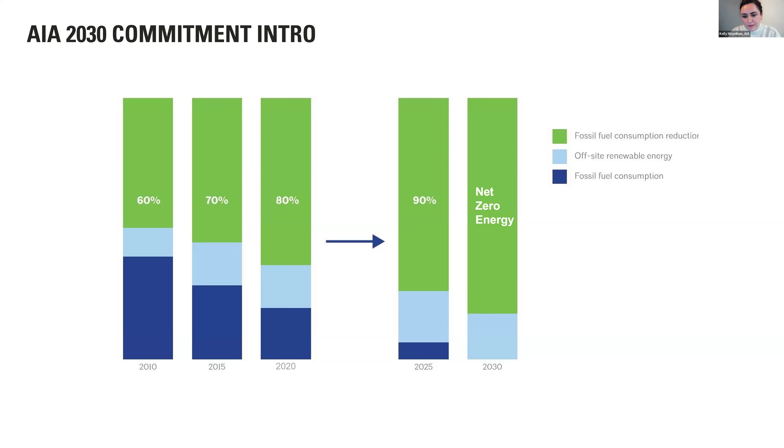So why is this important? I hope I don't have to spend a lot of time talking about this, because most people on this call are aware of what's going on in the world, and have heard before why the climate crisis is real, and that these are things we have to be tackling every day in our practice because they impact all of us across the globe.

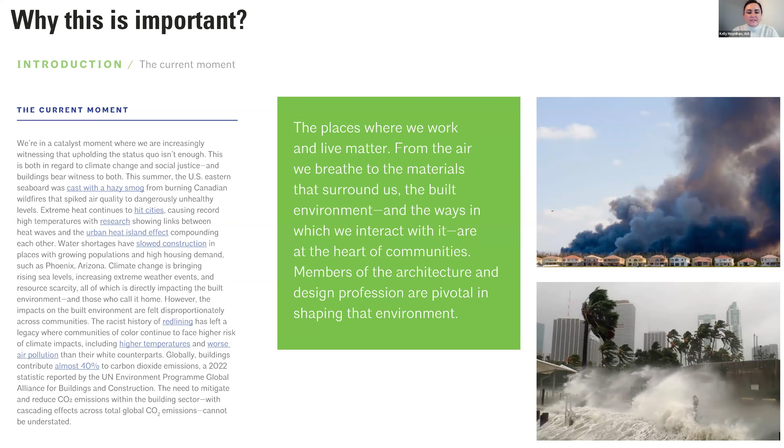Another statistic often thrown out there is that building operations are responsible for about 30% of greenhouse gas emissions globally, and embodied carbon emissions are another 11% of the greenhouse gas emissions globally. So what does this mean? It means we have the huge responsibility as architects, as well as opportunity to be a part of the solution. We are somewhat in the driver's seat to help our projects move towards these 2030 goals, so we can help address the issue that a lot of what we do is a huge contributor to global CO2 emissions.

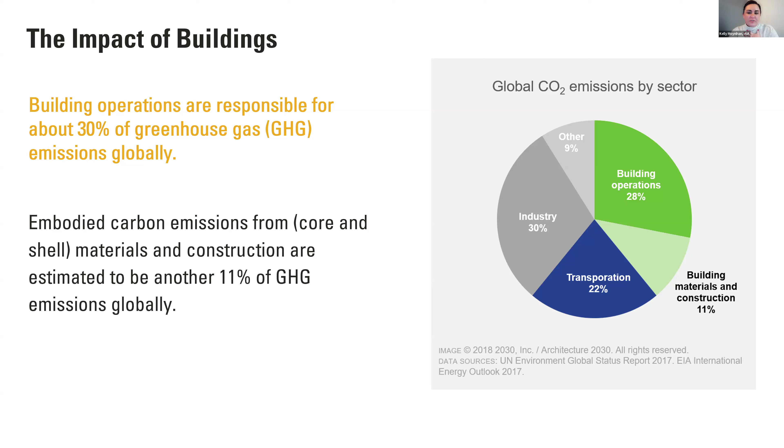So what is the designer's role? How, as an architect, can we be a part of the solution? Architects and engineers have the greatest impact early in the design process, but also throughout. We have to be advocates throughout to make sure this happens, because a lot of times we're not going to be asked to do this. Certainly energy codes are getting better, or maybe clients are already asking for things, but a lot of times that's not enough, or it's just not the case. So it's really our job to be the advocates and champions of this as we move through our projects.

A few ways we can tackle that through the design process: think about adapting or renovating buildings instead of tearing them down. The most sustainable building is one that already exists - that's a quote said all the time, because the embodied carbon of a building that's already built is something we want to address. So if there's ways to use buildings from the get-go rather than do new construction, that's something we should be analyzing and testing rather than just assume new construction.

We can certainly design for extremely high performance and resilience in the way we detail our buildings. Again, building science has already shown us how to do these things - these aren't necessarily new concepts or technologies for how we design better envelopes. So we have to prioritize those.

We should be energy modeling everything as best we can. When you're putting together a contract for a project, if energy modeling isn't required or being asked for, maybe suggest it, in that it's going to make the project better, and suggest that it happens early and often throughout the design process.

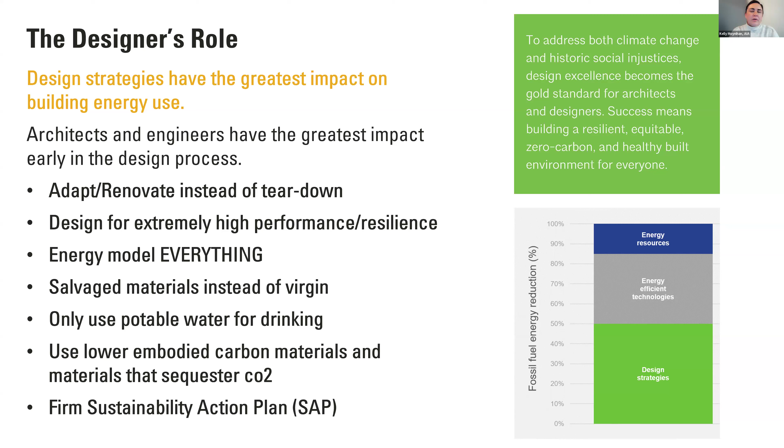And then something we'll talk a little bit about later is having a firm sustainability action plan. That's something more personal to your firm, but it declares your commitments to what your firm is going to do from a sustainability standpoint, whether that's in operations, design process, et cetera.

So how do we also talk about this in terms of benefits to our clients? I think we can all agree these are good things to do, but how do we actually make the argument? Certain things we'd like to suggest as ways to appeal to a client's interests are to talk about resiliency. I think sometimes the word sustainability can be glossed over, or it's maybe a little tired, but talking about resiliency as far as durability or being able to withstand climatic events, and talking about it in terms of maintenance and operations, can often perk the ears of a client.

Addressing ESG regulations, I think certainly when we talk about energy savings as dollar savings, return on investment, those are always good arguments to make. Thinking about market innovation and how that impacts the bottom line of the project.

You can also appeal to maybe their egos a little bit and say, if we do these really innovative, sustainable strategies in our project, it will get you attention, it will win you awards, things like that. I think that can attract certain clients' or stakeholders' interests, as well as the PR message. If you can make certain claims about a project's performance, impact, or innovation, those are things they can also sell and brag about as they get to live and use their space.

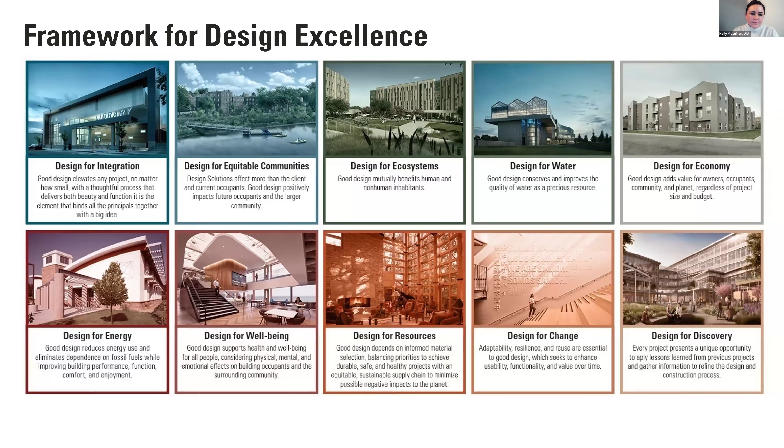So when we talk about metrics and targets for the 2030 commitment, the two big metrics that are considered are energy use intensity, or EUI, measured in kBTUs per square foot per year - that's the amount of energy use based on how big the building is. And lighting power density, or LPD, measured in watts per square foot.

For new buildings and renovations, the targets for this next reporting year - not last year, 2024 - we're still at 80% below baseline, but starting this year we have to be looking at 90% below baseline based on your project type. So this has incrementally gotten more aggressive as time has gone on.

For interior renovations, you only have to report LPD, which should be 25% below baseline. I think this group definitely thinks that should maybe be a little more aggressive, since 25% isn't really all that difficult to achieve, but that's where the marker is now. You're encouraged and able to submit more data than just your LPD, but that's all that's actually required for an interior project.

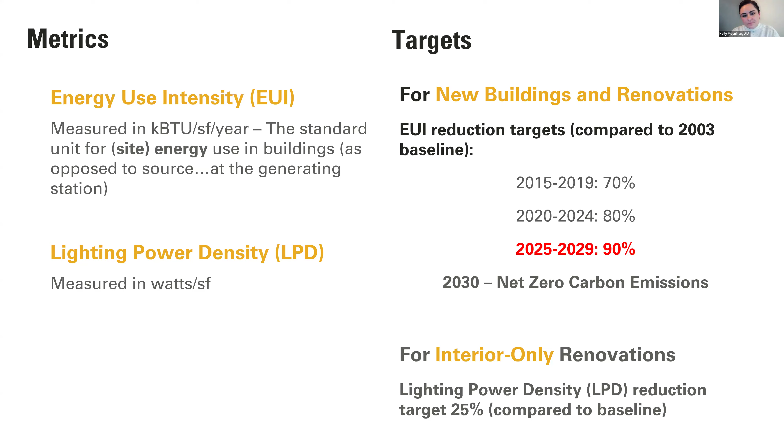So, steps to work towards these reductions. First, you're going to use the AIA DDX, an online platform we're going to see some screenshots from in a minute, to find the target goal based on the use type. If it's multifamily, that has its own base type based on square footage, etc., versus a different target if it's a hospital or education. They're all adjusted based on baselines for those project types.

Our first challenge is to design to reduce overall energy usage. How do you do those things early? You can look at site analysis - specifically what the climate data is for that place, or what orientation is possible for new construction or existing buildings - how do we address its current orientation and how it addresses the site to optimize energy use.

Model and document the predicted EUI, or PEUI, at each phase milestone based on ASHRAE 209. We can develop strategies to hit those goals of reduced PEUI or LPD as you move through design phases. And the goal is that you're reporting and sharing that data for every project every year, regardless of where it is in the design process.

Really you're only reporting your data based on what design phase it's in at the end of that reporting year. So while you could be tracking it throughout the year, if your project is at 50% design development at the end of 2024, that's the stage you would report that data in. For the next year, you would look at whether that project got through to construction documents, because that would be the last time you'd report the data.

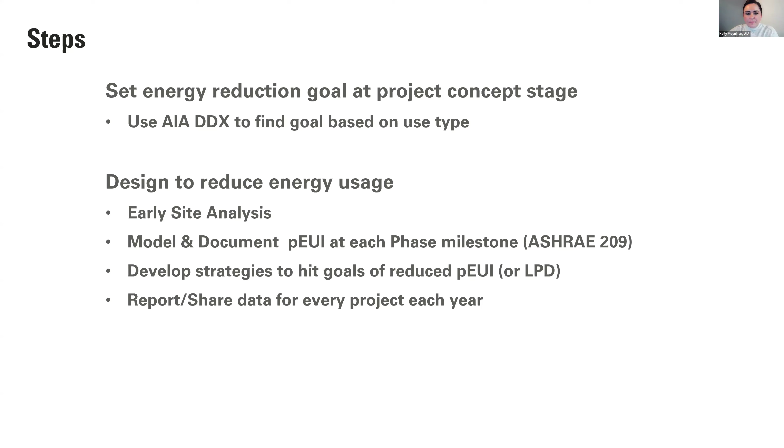So just to say a little bit about how we approach projects - first and foremost, you should be looking at where your project is and getting the climate data for that place. You can address it based on solar orientation, how many sunny days you get in the year, how much rainfall you get, cloud cover, etc. You take that into account as you're thinking about your building form, its geometry, its window wall ratio, etc.

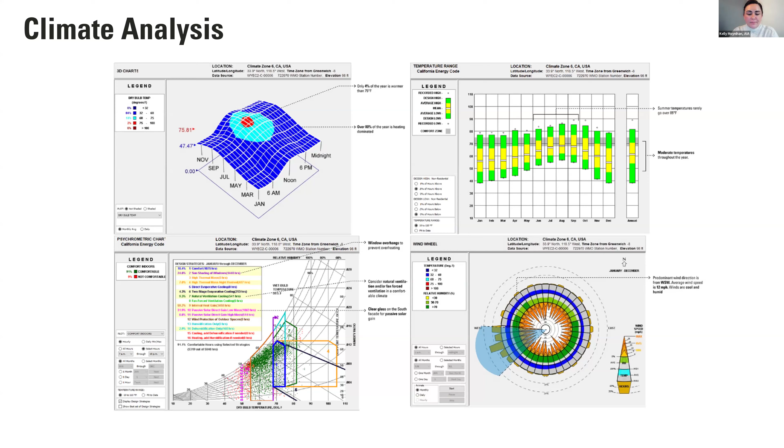Moving into determining the predicted EUI - again, it uses a baseline, which is the code equivalency.

Did everybody hear that? That was weird. Sorry, I don't know what that was.

So you use the code equivalency based on the project type, and that's where the baseline comes from. Again, this group definitely advocates for energy modeling early and often. Your early energy analysis is done in what's usually called a shoebox model, which is sort of a white box with not a lot of articulation.

So you're using that to play with form, or maybe where you're going to have glazing, etc. And then as design moves on, you're going to move into more detailed full energy modeling, where you're starting to introduce system information, etc.

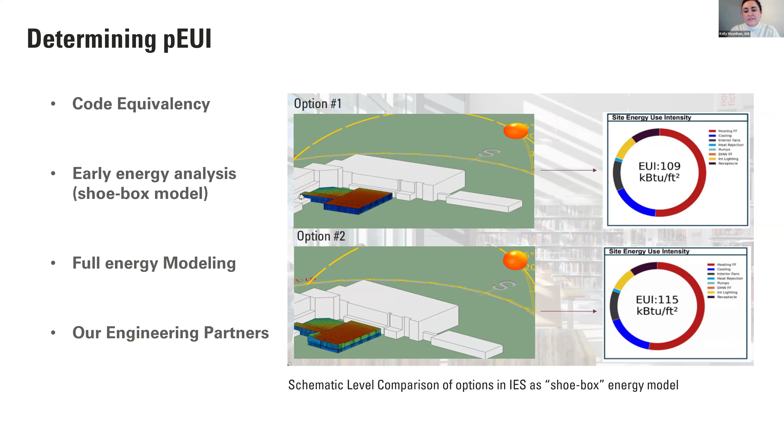That's where engineering partners come into play, because they are just as important as the architect in this design process - they're going to help us right-size our systems in tandem with examining envelope and things like that. They really need to help make sure the accuracy of our systems gets put into the energy modeling. Sometimes they're actually the ones doing the modeling, but either way, we want them to be an active participant.

So, methods of reporting to the DDX. There's a couple different ways to do it on the online platform. You can either do it directly into the DDX, where you're putting in inputs piece by piece, project by project. You can also do a bulk upload via a master spreadsheet or an API link from energy modeling software such as Insight 360, Cove Tool, etc.

And then you'll notice as you do it for the next year, those projects will remain, and you'll decide whether you're reporting for this new year or closing them out. So this is like your main log of all of your active projects.

So if you're setting up a new project, you have to enter some basic information, name, project number. You can leave this as specific or non-specific as you want. Sometimes people want to make sure there's some anonymity with project names and information. But you do need to locate where it is, so postal code, city, climate zone, etc., what project type it is, and construction type.

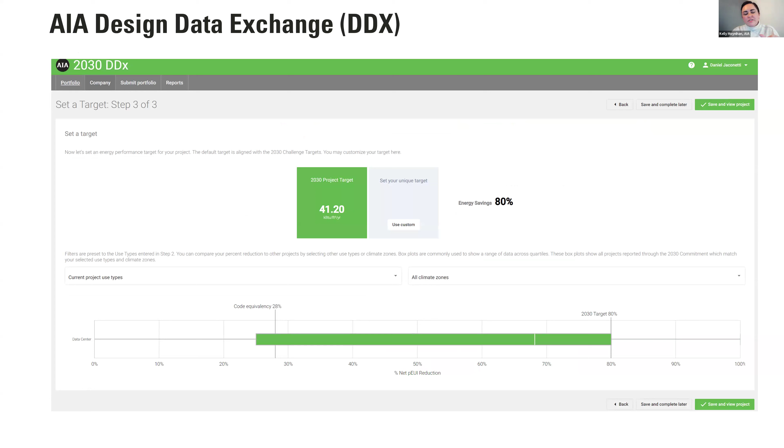So what do we have here? This starts to show you, as you enter all that data, where you land as far as where the 2030 project target is—that very aggressive mark you're supposed to be hitting—and then where you're landing, how other projects are doing in that project type across the entire portfolio.

This is another part of the DDX that is not necessarily required, but being more and more encouraged, is how you're addressing renewables on site, whether or not you have them, and how they're contributing to the energy use of the project.

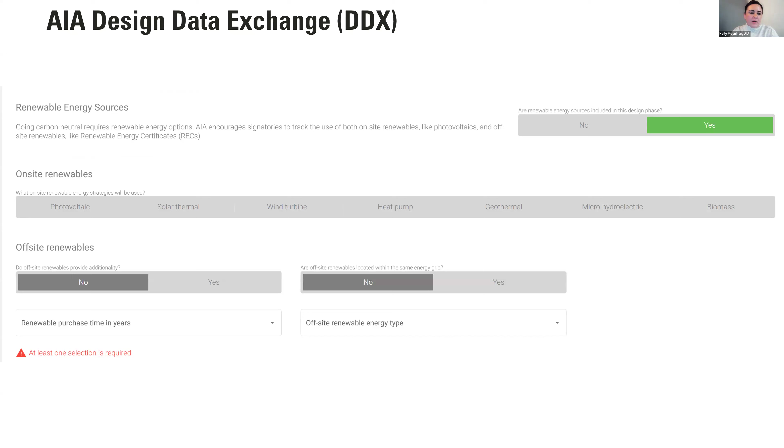And then same for embodied carbon. This is gaining more and more traction, and Daniel will talk more about it in a second. But this is where you actually enter in your embodied carbon modeled data, what tool you use, et cetera.

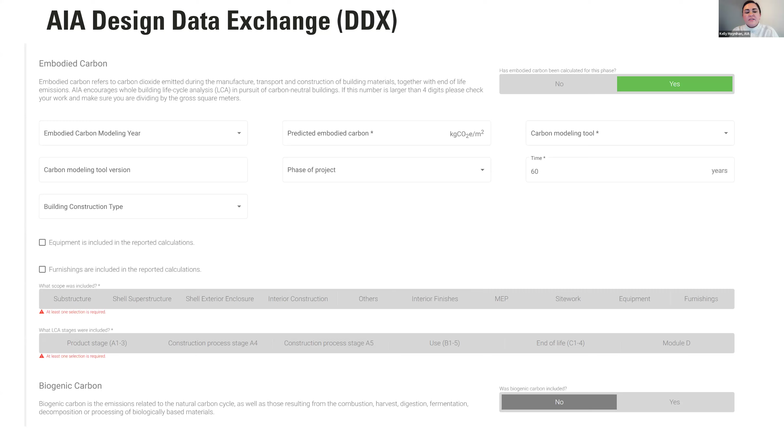Ideally, you wouldn't just be doing this at the end of the year and say, oh, I guess that's how well we did. Instead, it could be something you're updating throughout the year and tracking, so that you could make adjustments in your design process or practice, or address it with project teams, like we got to do better, or we should really be considering modeling earlier on projects so these numbers can get better. So this is how you get a global look at how your firm is doing.

So I think we'll sum up, like, how do you meet these 2030 commitments? It's a very challenging thing to do, let's just say that outright. Very few firms are actually even hitting the targets, but they're aggressive for a reason, because we all have to be trying to optimize our projects as best we can.

So how do you do that? First thing I already said, energy model early and model often, both energy and embodied carbon. This is how you actually track progress and make decisions, and that's how you connect that performance to design excellence.

What story are we telling in these design decisions, and how do those contribute to the story of, is this good design, based on those frameworks of design excellence principles I talked about earlier.

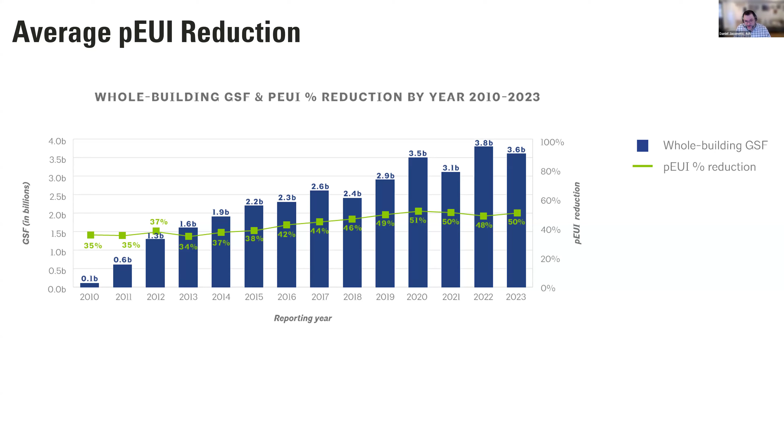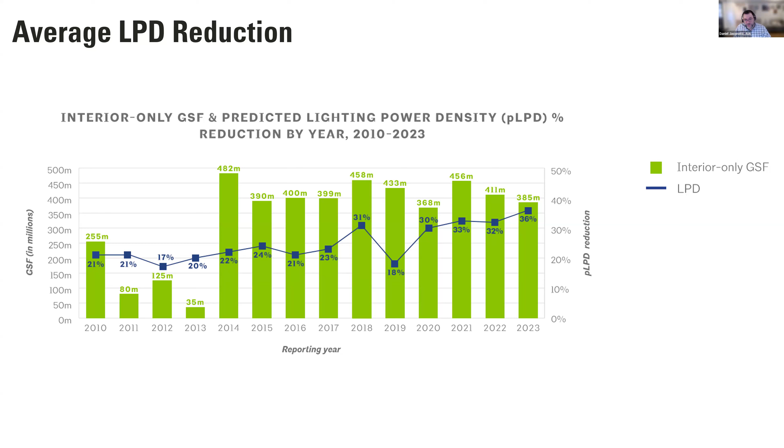Now, going over to the interior-only projects, where again the 2030 program is only looking at lighting and lighting power density — this has been oddly up and down. Who knows what happened in 2019, but it's about 36% on average. The goal is 25, so as Kelly mentioned, we're actually doing better than the average. Maybe we should push this further. Lighting efficiency is often low-hanging fruit, especially with LED lighting.

Before we get into deeper things like electrification and embodied carbon, I want to pause and talk about the carbon dialogue going on, because there's a lot of language about this. Clients are asking, people are playing fast and loose, and there's a lot of confusion about what we're actually talking about. First of all, whether you hear someone talk about carbon, decarbonization, or embodied carbon, at the end of the day what we're talking about are greenhouse gas emissions, predominantly carbon dioxide. However, things like methane are actually more potent than carbon dioxide. But because the most common and most volumetric greenhouse gas emission is carbon dioxide, the industry expresses everything in metric tons of carbon dioxide equivalent. So when you see CO2 with the little 'e' after it, that's saying if we have this much methane, what would that be in carbon dioxide equivalent, so we're measuring it equally. So we're talking about greenhouse gas emissions.

This can be divided into 3 different scopes, per the greenhouse gas protocol. The first 2 scopes can be called operational emissions — this is basically looking at energy efficiency, all the greenhouse gas emissions that come from running a building. Scope 1 are direct emissions from operating it on site. So if you burn any fossil fuels on site — a gas boiler, an oil hot water heater, diesel backup generation, all of that — those are your scope 1 emissions, greenhouse gas emissions happening on your site.

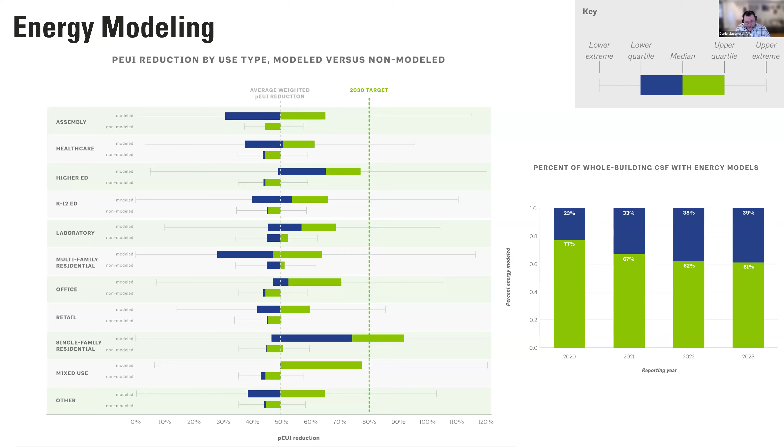And you can look at the chart to the right by year, showing percentage of energy modeling. For some reason it's gone down since 2020, but we're hovering around 61% of projects being energy modeled as a group of reporting firms.

And in case you're wanting to get into energy modeling and you're wondering what people are using -- that's part of the reason AIA collects this data -- you can see that a lot of people are using cove.tool. The next most popular one is IES, which is what my firm uses. I'll tell you, in our firm that's done by mechanical engineers; it's a little bit more difficult of a tool for architects to use. I think a lot of architects prefer things like cove.tool.

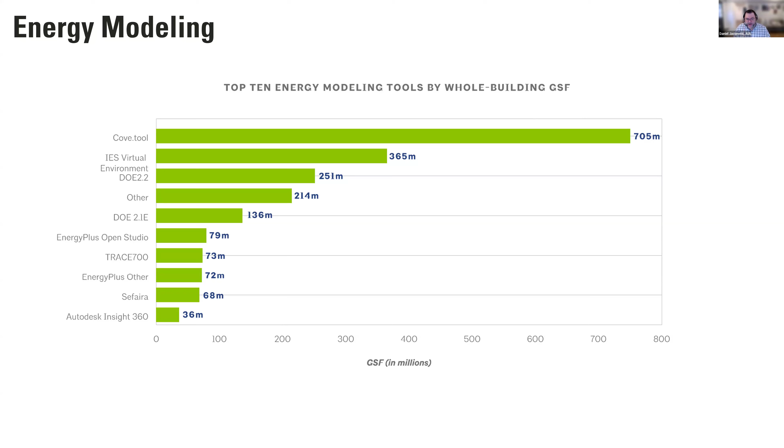And for whatever reason, Insight 360 is down there at the bottom, but Insight 360 actually comes free with Revit. So if you have not done any energy modeling and you're looking to get into it, that might be a good place to start, just because you don't have to lay out any money to purchase something. There are good resources on Autodesk's website, and some good YouTube webinars about how to do energy modeling with Insight 360.

Okay, so we talked about why electrification can be useful. Now let's look at the grid. 20% of the US grid currently is powered by renewable electricity, and if you look at the graph on the far right, that shows how that breaks down. It's predominantly wind, but there's also hydro, solar, biomass, and geothermal.

That's real geothermal, not what we often call geothermal in buildings, which is really a ground source heat pump. This is like tapping into the heat of the earth and using it to boil steam to turn a turbine -- that's power plant scale stuff, not something you're doing on site. 933 buildings reported last year as all electric, so that's great -- you have to report the fuel sources. Kelly showed you the breakdown screen.

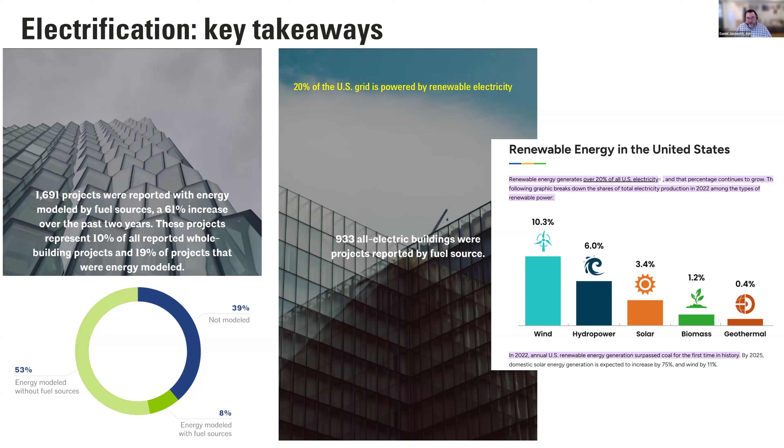Key takeaway: if you're the person in your firm reporting the project, you want to get a copy of the energy modeling report from whoever did the energy model, because you probably know the final pEUI, but you may not have the full fuel source breakdown. Get that copy so you can enter it by fuel source so you can really push on these things.

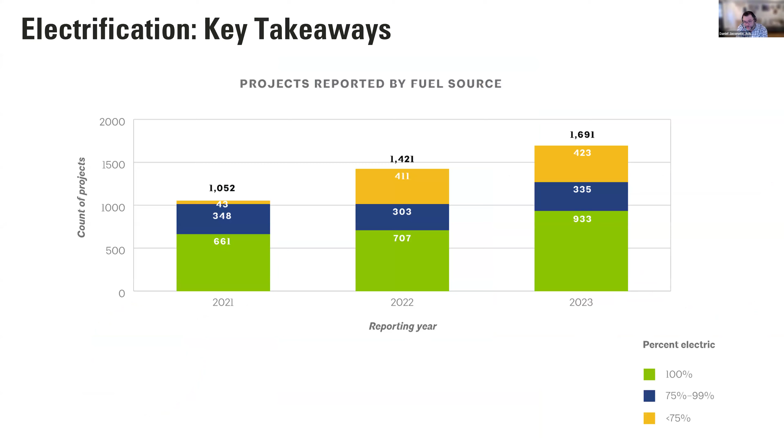Then you can look at electrification for the past 3 years of the program. The number of projects that are 100% electric has been steadily increasing, and you still have a lot of hybrid projects out there.

Renewable energy: there were 430 net zero projects reported, a 24% increase from the year before. That's over 2,000 projects and over 400 million gross square footage using renewable energy resources, which is great.

Projects in California, Massachusetts, Washington, and New York had the most projects reporting renewable energy, while Vermont and Maine led in the greatest percentage of projects with renewable energy resources. I find that interesting because if you look at this map and see the blue and gold, the projects with the most renewable energy reported are also the states with the most stringent energy codes typically, and also states with cleaner grids. It's interesting that these things go hand in hand. You can see the line graph on the left showing the increase of projects with renewable energy over the 3 years of reporting.

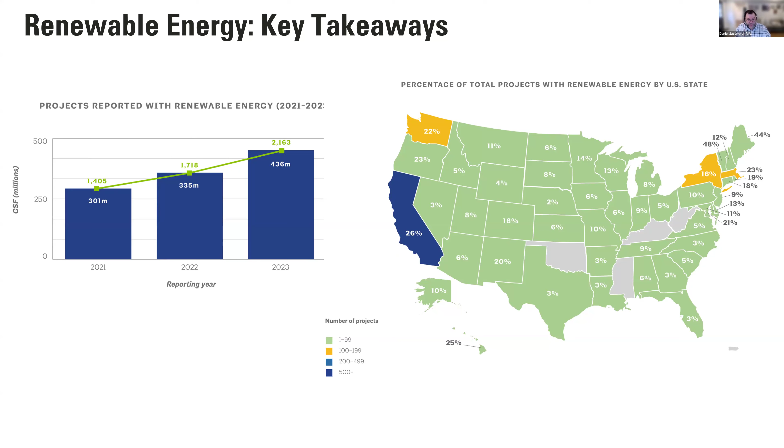A lot of projects have been reporting embodied carbon. Almost over 150 firms have reported over 7,000 projects. That's a 30% increase, or 30 more firms, from the previous year.

A lot of the projects reporting embodied carbon are new construction, some are major renovations. Every project doing a major renovation should be reporting embodied carbon because you're saving all the embodied carbon of the building structure that's already there—that's a missed opportunity if you're not reporting it. There's a tool called Care Tool, a web-based tool, that will help you calculate the embodied carbon of existing buildings that you're saving. That's really important.

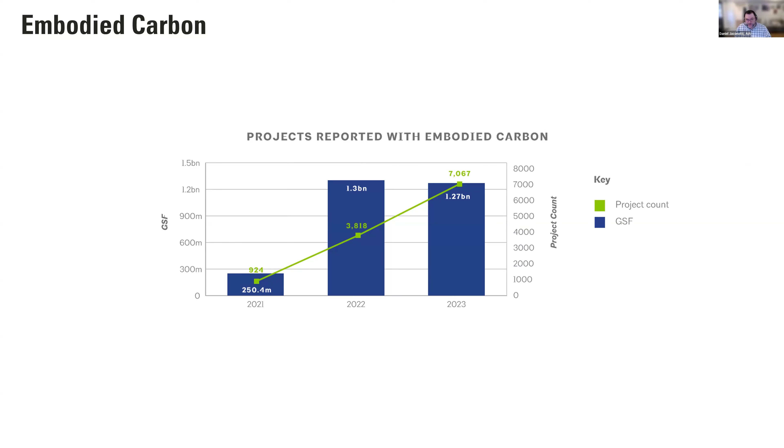We've sort of leveled out since 2022 in projects reported with embodied carbon. This just shows embodied carbon intensity—embodied carbon per area of building by different use types. You can see multifamily toward the middle is more intense than some of the others, based on the data people are reporting.

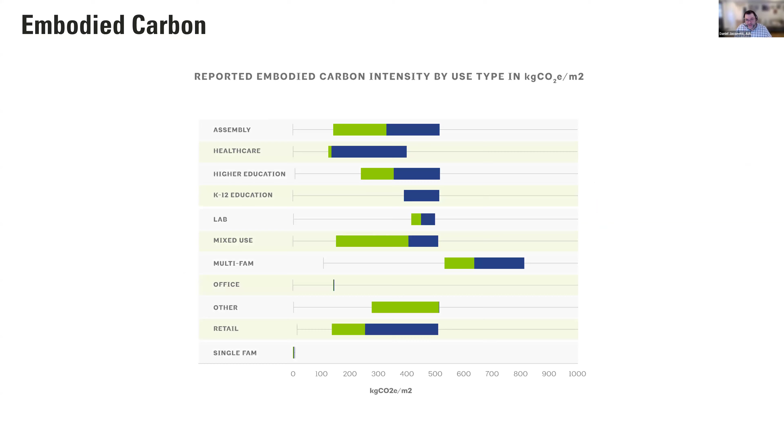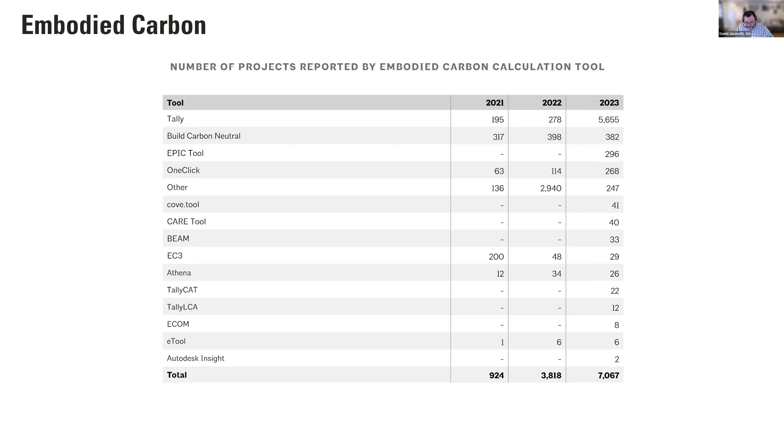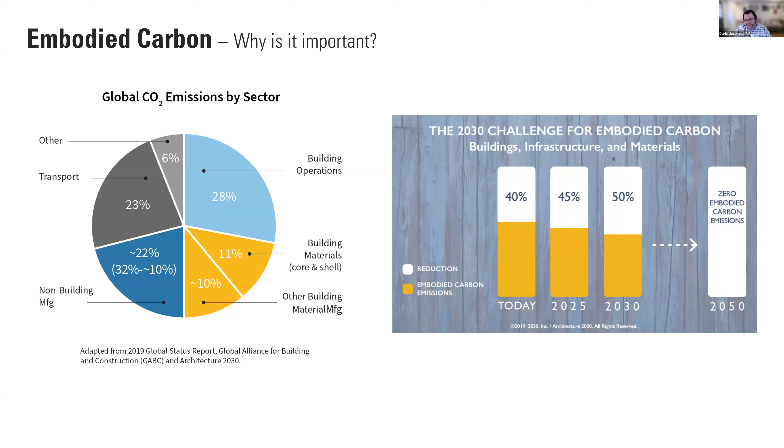Why is it important? Because building operations is this 28% piece of the pie, but if you look at the embodied carbon that supports the building industry, you've got another 22%. So if we're going to get to zero embodied carbon emissions by 2050—this is from Architecture 2030's website—we need to be looking at embodied carbon.

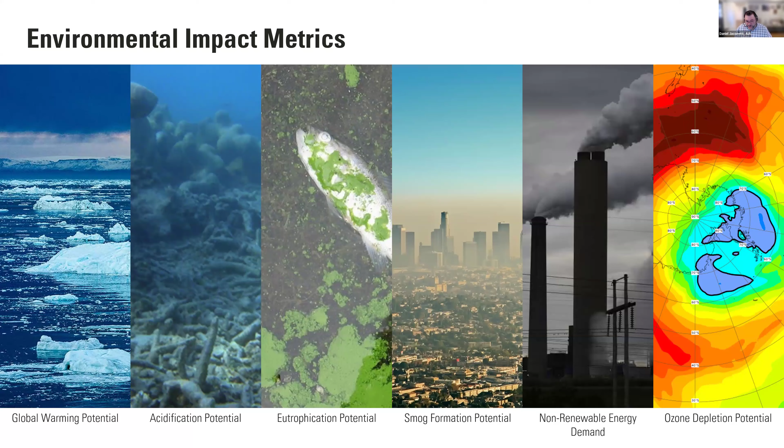When we look at embodied carbon here, we're really mostly only looking at global warming potential, because that's the clear and present danger. However, greenhouse gas emissions affect all these other environmental things. If you're doing a life cycle carbon analysis for LEED, there's a credit worth 4 to 5 points—you can't just look at global warming potential, you have to look at all of these metrics. That's an important thing.

So, design strategies to reduce embodied carbon.

First, you get a baseline. The Carbon Leadership Forum is the leading research authority on this. Our co-chair David mentioned he's been involved in Chicago's chapter. Their website has all sorts of data on baselining by building type, by sector type.

So you figure out your baseline, then strategies to reduce it. If you can reuse a building, that's huge. Salvage materials like Kelly talked about. The next step is optimizing structure. Let's say it's a new building—the more efficient your structure is, the less embodied carbon you'll have. It also saves money and time, with a more efficient steel grid or a more efficient concrete system. So optimizing structure is important.

Once you've done that, optimizing interiors. Do you need to use flooring? Can you do sealed concrete instead of adding the extra embodied carbon of resilient flooring over that? That's an example.

Bio-based materials—in the interior finish world that's things like bamboo and cork, but in the structure world that could be mass timber from responsibly managed forests. Those things absorb CO2 out of the atmosphere and lock it up in their structure as they grow. So that's a big way to knock down embodied carbon.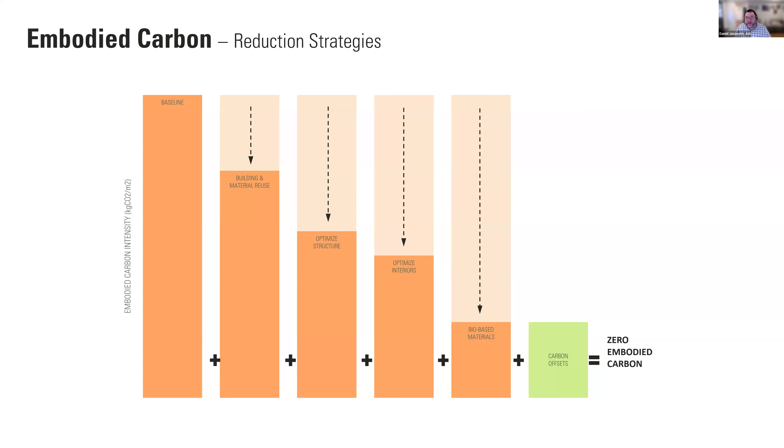Ultimately, you're not getting to zero embodied carbon without carbon offsets. So if someone comes to you and says they want their project to be carbon neutral, you really need to have a frank conversation with them, because there's no way we can design it to be as efficient as possible and squeeze as much out of it as we can—they're not getting there without purchasing carbon offsets at the end.

Now, carbon offsets—some people think it's a boondoggle, but it's not necessarily a bad thing if they're credible. As a member of the AIA Large Firm Roundtable, HED has now pledged to calculate the carbon footprint of our own office operations and offset it every year. We went through this process last year, and there are brokers out there—we worked with a company called Cloverly.

They're like a stockbroker, or a portfolio advisor—they do all the research, monitor the projects, and you know that when you're buying carbon credits through them, your money is actually supporting projects that will help either avoid carbon emissions or pull them out of the atmosphere.

There are avoidance credits—things like capping leaking methane wells that companies left behind, or taking refrigerants from old HVAC units that would end up in a landfill in states that don't regulate it, capturing and destroying them properly. And there are removal credits, like direct air capture or planting peat in forests, helping do that biogenically. So carbon credits can be useful.

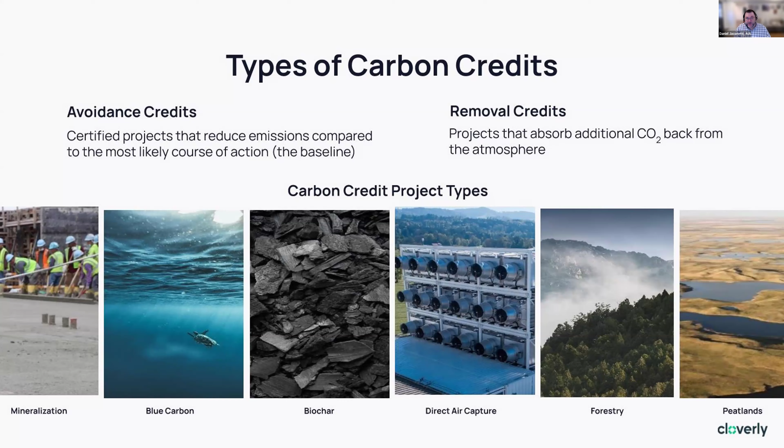Back to structure really quickly, since structure is where most of the embodied carbon is—there's a lot that can be done. At least in my firm, where we have structural engineering in-house, I can tell you structural engineers have often not been invited to the sustainability conversation. This is a great time to bring them in and look at the carbon of the concrete and of the steel, and potentially alternate systems like mass timber.

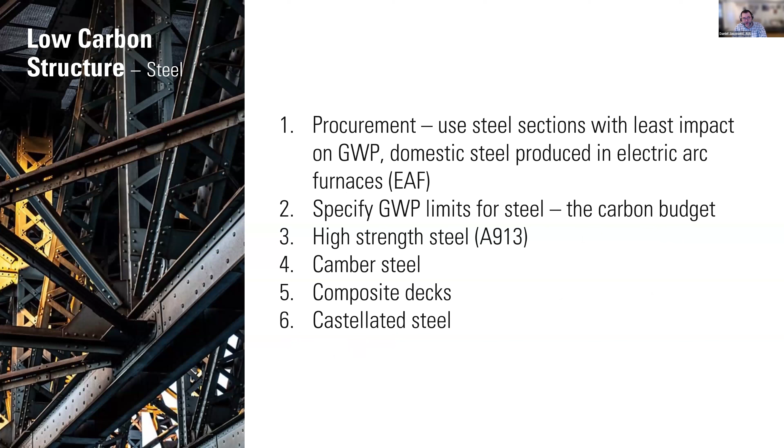So there are things you can do to decarbonize your concrete structure. In the Chicago market, we have access to Carbon Cure, which is a great strategy—they capture and inject carbon dioxide into the concrete mix. Oftentimes it can even be cost neutral as well as carbon neutral. And there are also strategies for decarbonizing your steel procurement.

Back to the 2030 program—mythbusters, frequently asked questions. If you're thinking about why you don't want to join: it takes too much time. It doesn't. Collecting data on a project is typically less than 30 minutes.

I think the key is you want somebody embedded in the project team to do it. You don't want one person responsible for doing this across an office with 300 projects, running around trying to get the data. You really want to empower people on the design team to do it.

It doesn't require too many resources. It's a free program and it gives you access to people like us who do this and can help you. We don't care if your portfolio has poor performing projects—that's how we all get better. The data is anonymous and aggregated anyway, so it's not a reason to not report.

And the 2030 goal is a goal. I mean, we want to get there, but it is a goal. It's not like you're committing and signing a blood oath that everything you design will be net zero by 2030. Otherwise, you're no longer going to be practicing. It's an aspirational goal, even though we want to try to get there.

And it doesn't have to be complete projects, right? Kelly mentioned you want to report at every phase. And that's how you can maybe say, oh, we did an energy model at SD and we realized the project could do better. It's only SD, so now we can make some design changes that would make the project do better.